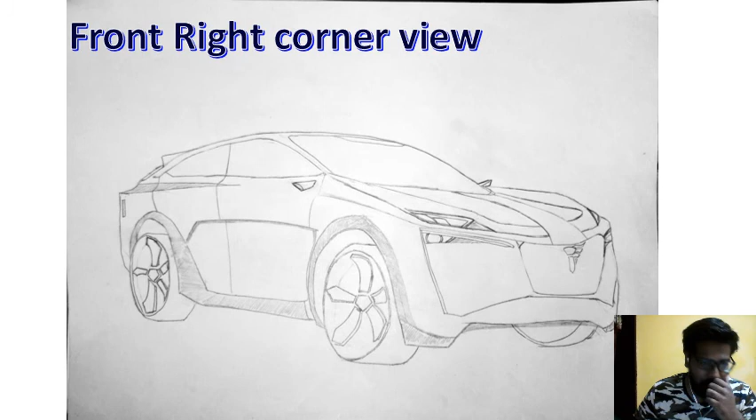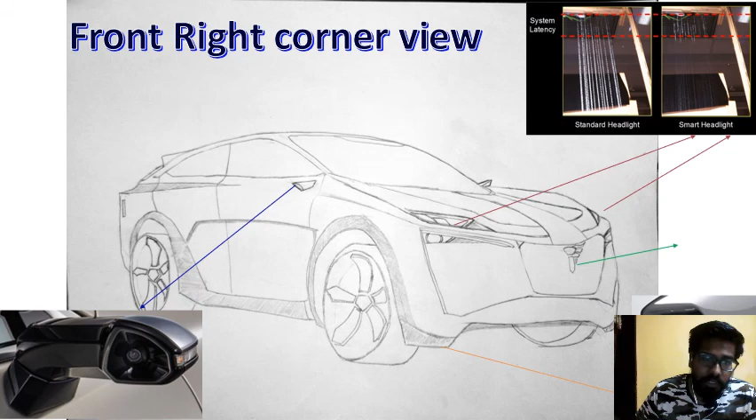Starting off with my presentation, this was my initial design pitch. The front right corner view has front lights which are smart headlights, retractable fenders in the front with side camera views, and the logo acting as an RFID sensor.

Eventually I felt that the logo as an RFID sensor didn't fit properly. So I placed the RFID sensors on the body itself instead of the logo, because RFID sensors work better with multiple components rather than a single one. If it fits on the body, you can put multiple sensors instead of just one in the logo.

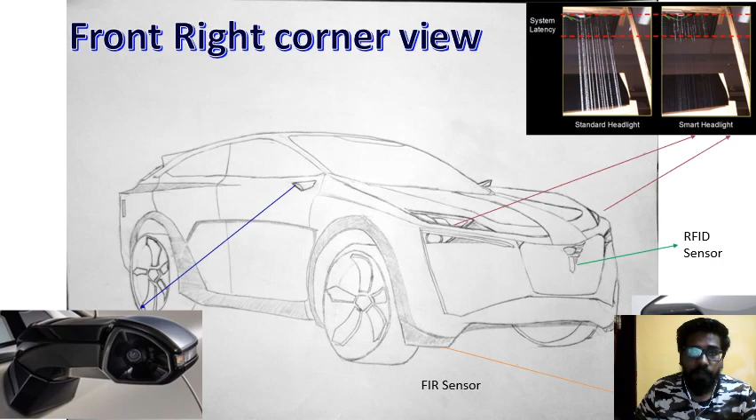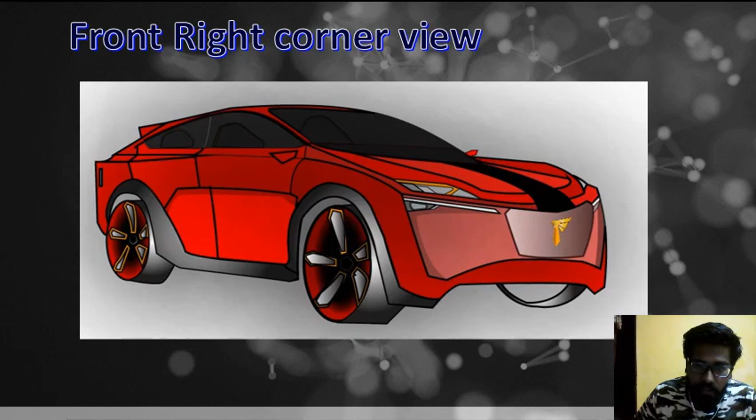Proceeding with this is my completed drawing of the front view corner. You can see that the logo placement has slightly changed from up to down into the center, and I've given the car a red iridescent color, which looks really nice.

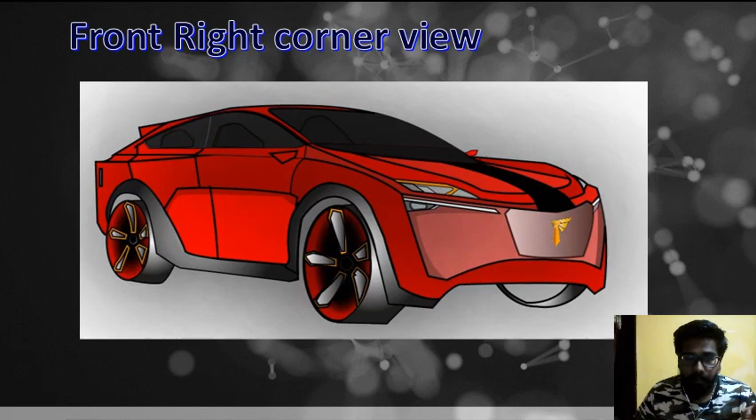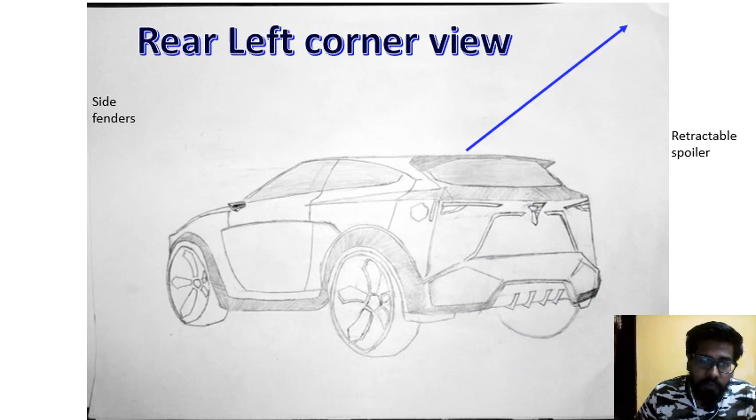For the rear view, I removed the petrol tank and moved the charging port to a vertical place. This gives a very neat view when looking from the side. There's a retractable spoiler and rear matrix light with side fenders, and FIR sensors at the back with composite body materials.

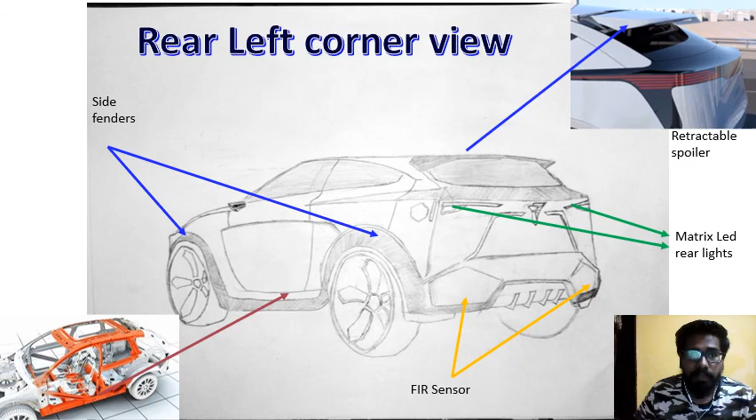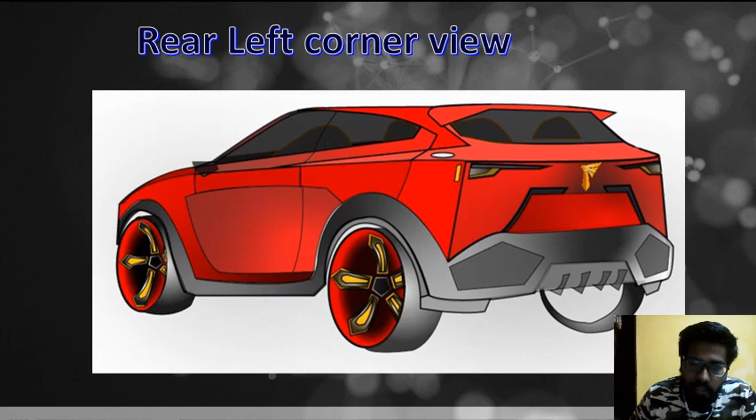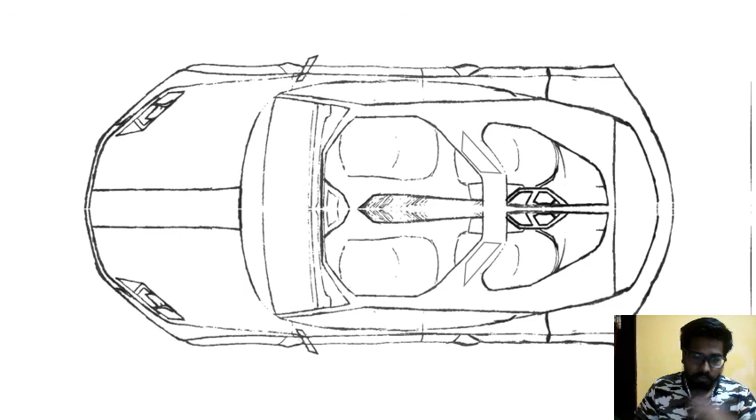Now I will proceed with the top view. The top view initially had the length of 460, so I maintained the same length. I tried it in SolidWorks and worked on the underbody of the design, so it fits properly. This is my design pitching lens.

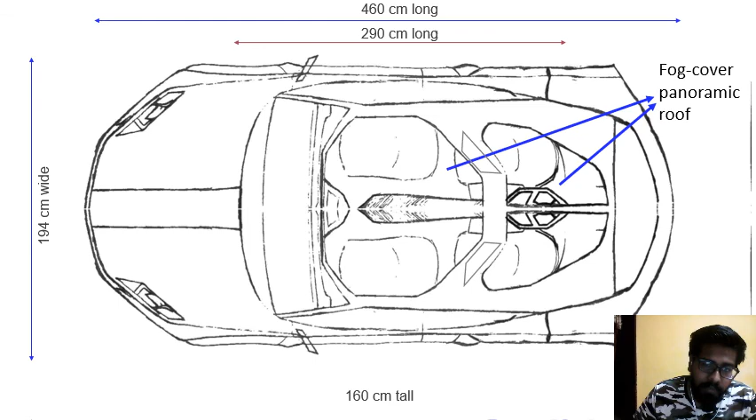And then I had this fog cover panoramic roof and Wi-Fi boosters. This is my completed design, but I didn't put the Wi-Fi boosters on top.

I integrated the Wi-Fi boosters interiorly so that it doesn't look ugly from the outside. So we can see the lifted up dashboard, flip dashboard, viewed from the top with the transparent panel roofs, and this is the mid plane. We can notice that the charging port has changed to vertical.

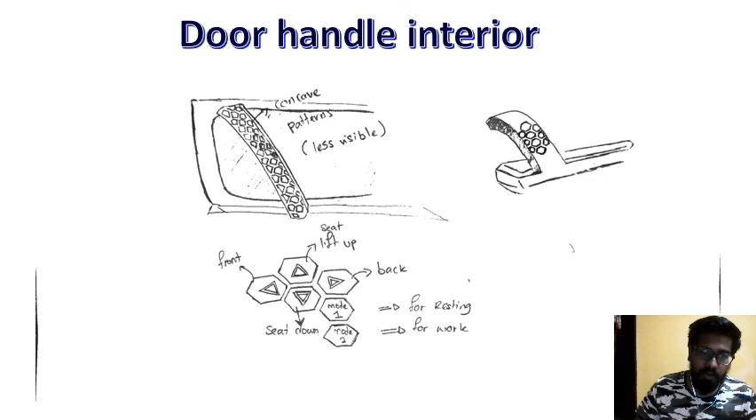Continuing the design pitching with door handles with 3D integrated designs, and dashboard close view with flip dashboards with three-way flipping, and then the interior view.

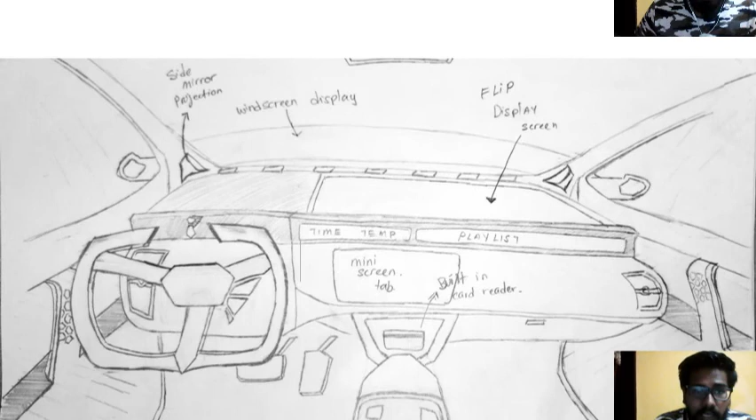Altogether, this was eventually discussed in the design pitching recommended by our friend, who said that projection of augmented reality is better than putting it in the dashboard.

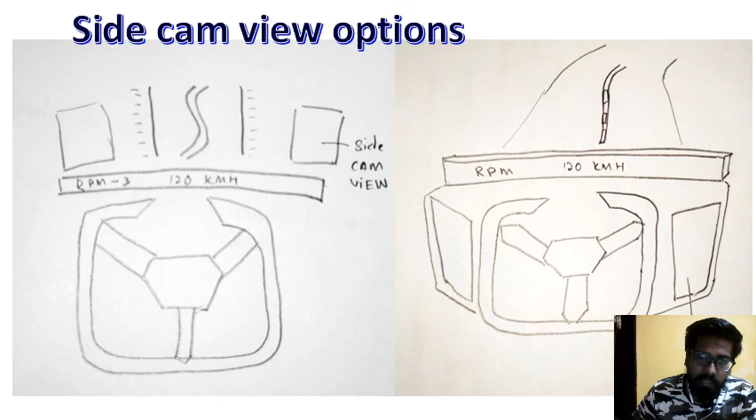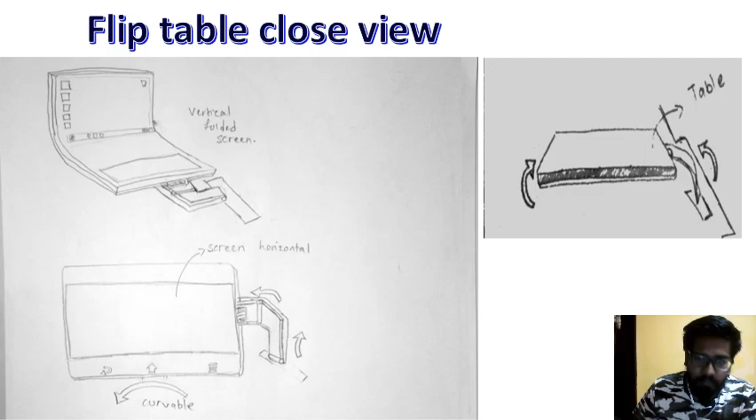Altogether, with interior and exterior features like the flip oval table and flexible table, and also with the speaker surrounding, fixed to the seats, which has an anti-disturbing feature mode so that it doesn't interfere with the person sitting next to them.

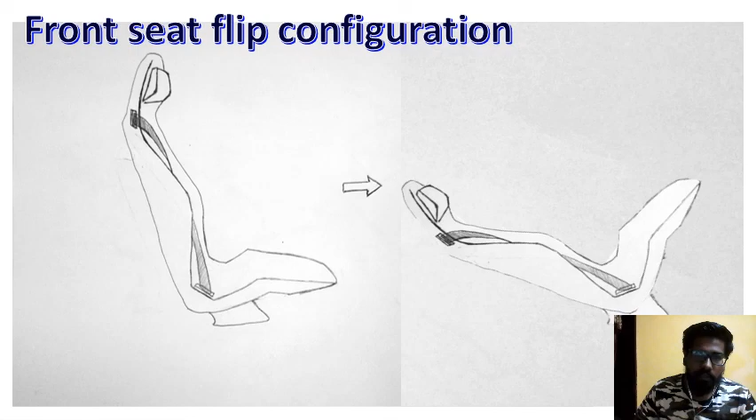So altogether, the design is compiled, and this is the interior view. We can notice that the steering has been changed from before, because I felt, as Sir mentioned, the crop image wasn't so nice, so I improved the design.

And this is the overall view. Here is the flat surface plane for the screen, and this is the rear view, showing the foldable flip tablet and the speaker integrated with the seat.

Now for the final promoting and marketing strategy. It starts off with TV advertisement. My idea is that TV advertisement plays a major role, but not by just putting an advertisement.

It should be a video advertisement. Video development can be done because it gives the main idea for the features and highlights of the car. If we just put posters to advertise, people don't tend to read a lot, they just want to finish with a glance, so they won't get the information we're trying to give the buyer. So my idea is to do a video and make a small promotional video.